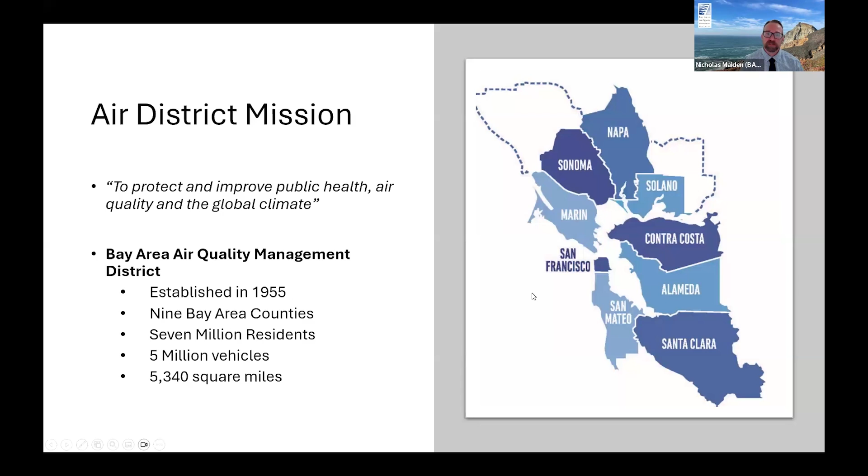So what does the engineering division itself do? We issue permits for over 10,000 facilities. We get about 1,200 or so applications per year. That varies depending on market and other factors. But a good portion of that, 400 or so, are engine applications. And we conduct about 300 health risk assessments per year.

We issue several different kinds of permits. Authority to construct, which allows you to construct or install equipment. What's called a permit to operate, which allows you to operate equipment. And then a registration if you don't need an authority to construct or permit to operate, and then a certificate of exemption if you choose to get one from us. We also maintain an emissions inventory, and we issue and maintain federal operating permits.

So here's some statistics about the engines that we have. We've permitted close to 11,000 internal combustion engines. The bulk of those are diesel emergency backup engines, and of those, the majority are between 50 horsepower and less than 1,000 horsepower. That's what we call small to medium-sized engines. Anything larger than 1,000 horsepower was covered by a previous BACT determination and webinar.

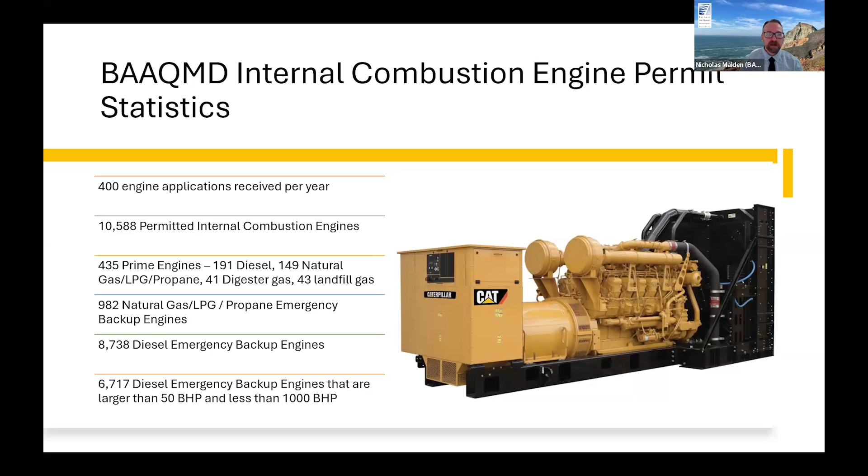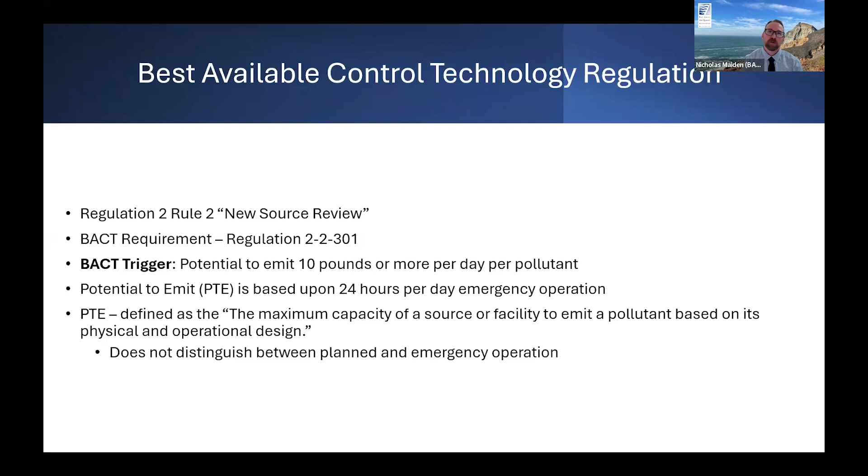So what is BACT? We have a couple regulations that govern it. Regulation 2, Rule 2 is our new source review rule. It applies to new or modified sources of air pollution. And there's a requirement that if you have the potential to emit more than 10 pounds per day of a pollutant, you'll require best available control technology. For emergency generators in particular, it's based off of 24-hour operation. It doesn't distinguish between planned or emergency operation. So even though you may have an engine intended to only operate in emergencies and maybe up to 50 hours per year for maintenance, it will still trigger BACT based off of that 24 hours.

So what is BACT? How do you establish it? There are similar definitions in both regulations, but there's a little caveat. Both BACT and TBACT look at what's most stringent, either achieved in practice. So if another facility has put in something that's better performing and there's an emission limit and it's been demonstrated through source testing and other means to meet that limit, then that could be deemed achieved in practice. There's something called technologically feasible and cost effective for BACT, where if there's something more stringent than what's been deemed achieved in practice, it's technically feasible for that particular source category, and it's cost effective, so the dollar per ton of emissions reduced is below a certain threshold, then we'll require that.

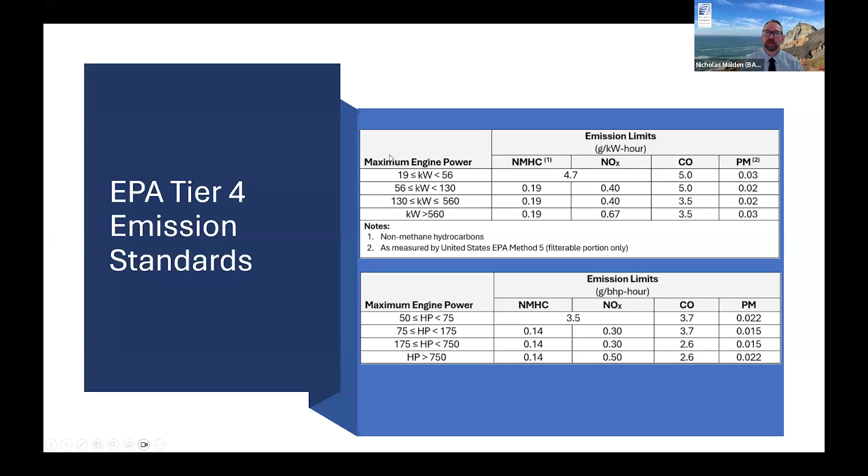One of the things that concerned us, particularly with these generators, is if they're available, because as we saw on the statistics slides, there's a large number of applicants and facilities that have these installed. So we want to make sure that these Tier 4 engines that are certified through EPA are available. And so we reviewed a database that EPA publishes of engine models and manufacturers and different size engines that have been certified to meet Tier 4 emission values.

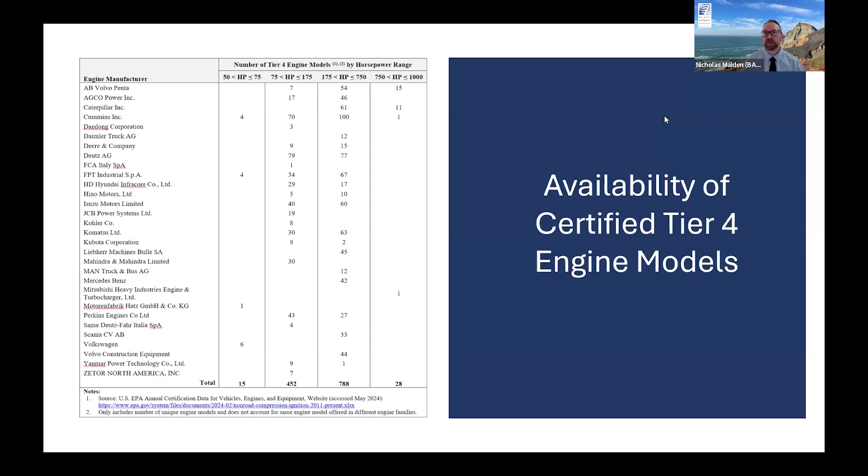And so we concluded that there are a significant number of available models, that this wouldn't be a limiting factor for applicants going forward. So how may an applicant comply with the Tier 4 emission standards? The first way is purchasing or installing a certified Tier 4 engine.

This is certified by EPA to meet Tier 4 standards, and there's a process that they have to go through. They source test, they review emission limits. There's some requirements these engines have to meet, and some features they have to have installed to be able to be certified. The second option is to have what's called a compliant Tier 4 engine.

So this is an engine that's packaged by the same manufacturer with manufacturer abatement equipment with identical or near identical components as a certified Tier 4. It just hasn't gone through their certification process, and it doesn't have some of the features that EPA requires for a certified Tier 4 engine.

The final way is to install what's called a retrofit Tier 4 engine. This is where an applicant may have a lower tiered engine, Tier 1, Tier 2, Tier 3 engine, and they add abatement equipment from a third-party vendor that's not necessarily made by the engine manufacturer. Because this is not made by the same manufacturer, there may be more requirements imposed because there's less certainty that it will meet these Tier 4 standards.

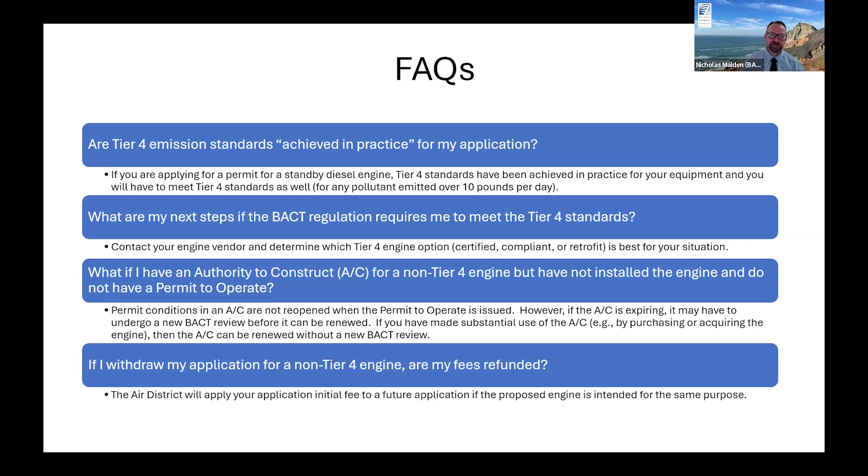So one question that comes up frequently, not just for engines, but for anyone: they find our BACT workbook or BACT guidelines on our website, and their equipment meets what's standard in that BACT workbook, and they figure that they meet BACT or TBACT. And as I mentioned earlier, the guidelines are really just a starting point. They don't supersede the regulation.

So BACT and TBACT is made on a case-by-case basis at the time an application is deemed complete. So if equipment comes in meeting the BACT workbook, it may or may not meet BACT. It depends if nothing more stringent has been deemed achieved in practice or technologically feasible and cost effective.

This question has come up; we've heard this from some stakeholders in other air districts where certain industries have said they're not allowed to install a certified Tier 4 engine, and they pointed to this NFPA regulation 110, and there's actually an amendment that was just passed where the language specifically states: where used for permanent level 1 applications, EPA mandated inducement engine shutdowns due to emissions system controls that are required on Tier 4 certified engines with SCR shall be prohibited.

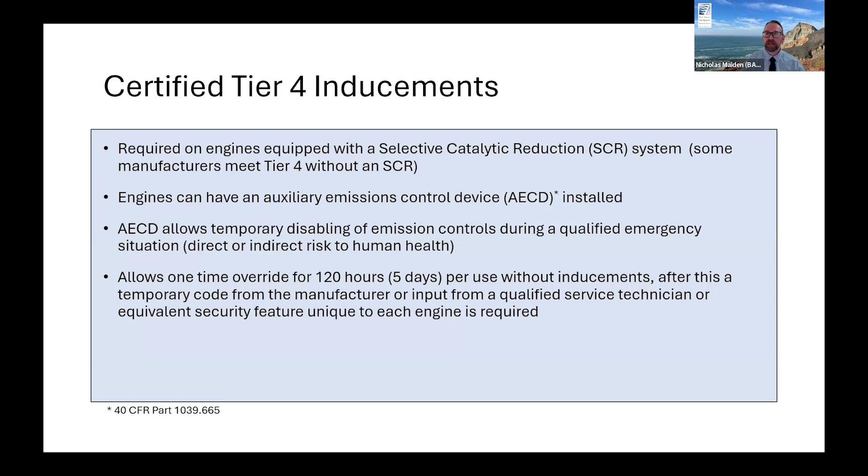And that NFPA 110 amendment actually applies to what's called level 1 installation. And so that code, NFPA 110, actually has 2 levels. Level 1 is where failure of equipment could result in loss of human life or serious injuries. And level 2 is where failure is less critical to human life and safety. And they give examples of both.

So level 1, if you have an elevator, a fire pump, fire detection, life safety illumination, emergency services communication systems, so like 911, essential ventilating and smoke removal systems, medical life sustaining systems. And level 2 is heating and refrigeration systems, communication systems other than emergency services, industrial processes, and water and wastewater treatment systems. And then standby generators used solely for telecommunication services to meet FCC guidelines are classified other than level 1 or level 2.

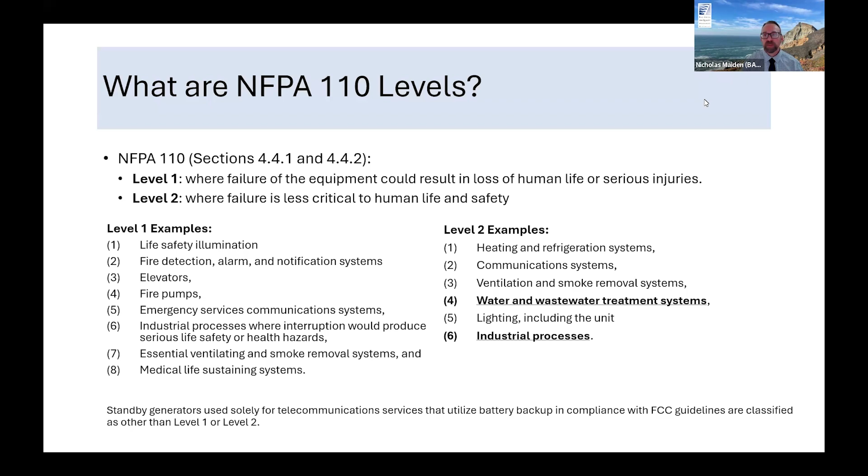One thing we've heard from stakeholders is they say, hey, I'm an essential public service, which is defined in our engine rule. It's defined in section 9-8-233 as a sewage treatment facility and associated collection system, water treatment delivery operations, public transit, police or firefighting facility, airport runway lights, or hospital or other medical emergency facility.

And the distinction between essential public service under Regulation 9 Rule 8 and not is how many hours of maintenance and testing you're allowed. So Regulation 9-8 allows essential public services' emergency generators to have up to 100 hours per year of testing and maintenance. Everyone else is limited to 50 hours per year.

And you can see there's a difference between the definition of Level 1, Level 2 in NFPA and Regulation 9 Rule 8. And so we listed some scenarios where you may be subject to that NFPA 110 amendment regarding the inducements. So the first scenario, your emergency standby generator is at a wastewater treatment plant. The way we interpret it is you're not subject to that section 5.6.5.5.1. You wouldn't need a certified Tier 4 engine with an auxiliary emissions control device. You can install any certified Tier 4 engine and still be in compliance with NFPA 110.

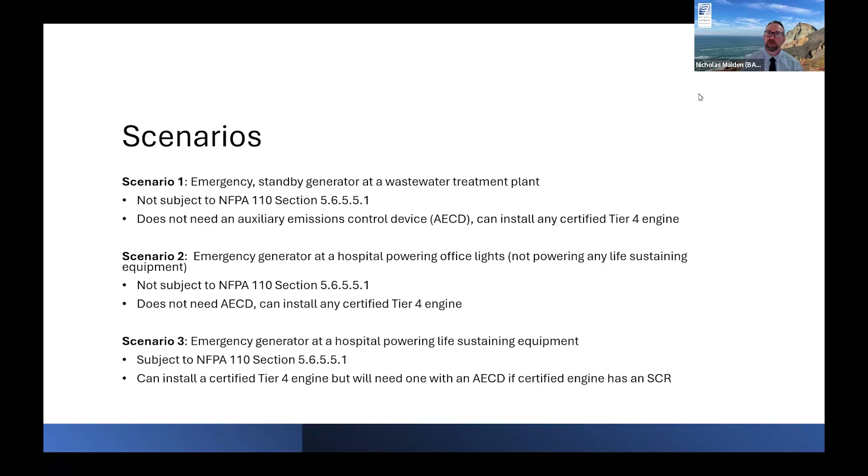So the question can be, does this mean that BACT or TBACT is certified Tier 4? No. As I mentioned, you can have a retrofit or a compliant Tier 4. However, the certified requires the inducements, and the intention behind that is that the engine won't operate. There are restrictions on operating the engine without required emissions controls. Similar to all our equipment that uses abatement to meet BACT or TBACT, we have a permit condition requirement that says you have to abate at all times, including emergencies.

And so if an engine is operated without emission controls, the owner operator would be in violation of that permit condition. What we're also proposing is that if you come in with a compliant or retrofit engine, there will be requirements to identify and track some features that will let us identify when an engine is operated without emission controls. So the alarm, data loggers, and some other features that'll alert us that an engine was operated without the controls.

And that owner operator, unless they obtain what's called a variance or an emergency variance from our Air District Hearing Board, or they obtain breakdown relief with our Compliance and Enforcement Division, will be in violation of the permit. So the other advantage to coming with a certified Tier 4, in addition to faster processing and less restrictions, is there's less enforcement risk, fewer parameters you'll be held to and required to track, because the inducement features will hopefully prevent operating the engine in a non-compliant situation.

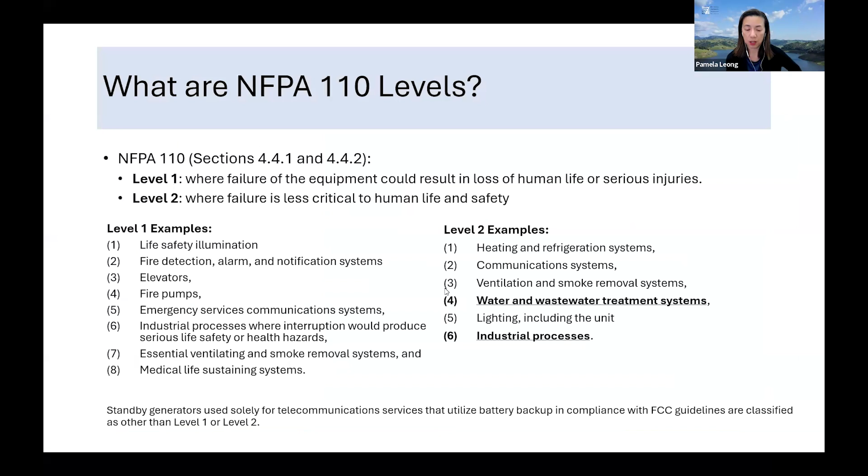In what situation will a retrofit Tier 4 engine not have abatement? The first two sub-bullets. So I think you're referring to your slide with the certified on the left, compliant in the middle. Yeah, this one. And if anybody wants to come off mute to clarify their questions, you can just raise your hand and we can unmute you.

Yeah, this is where we've seen that there are some, it appears from EPA's database, certified Tier 4 engines, that there are engines that through exhaust gas recirculation, through engine modification, can meet Tier 4 standards. And so this Tier 2, Tier 3 no abatement is the case where an engine manufacturer may take a Tier 2, Tier 3 engine and then through engine modifications alone meet Tier 4.

And the reason why we're making a distinction between engine modifications and CARB verified DPF is that there's more uncertainty with engine modifications that they can meet the emission standards. Whereas with the DPF, since you can add it on and we can verify the DPF is actually installed, that there isn't an issue with the DPF, there's a little more certainty with the emission levels. But if there's an engine manufacturer who'd like to correct us, please do.

Also, what we didn't mention is that if you go ahead and submit comments or if you have feedback afterwards, we'll take those as well. Right here, we're trying to cover different scenarios because we are rolling this out. We expect we will learn some things. We may find that there aren't Tier 1 retrofit installations out there. There isn't a Tier 2, Tier 3 abatement, no abatement option out there. In which case we won't see those applications and these scenarios wouldn't apply.

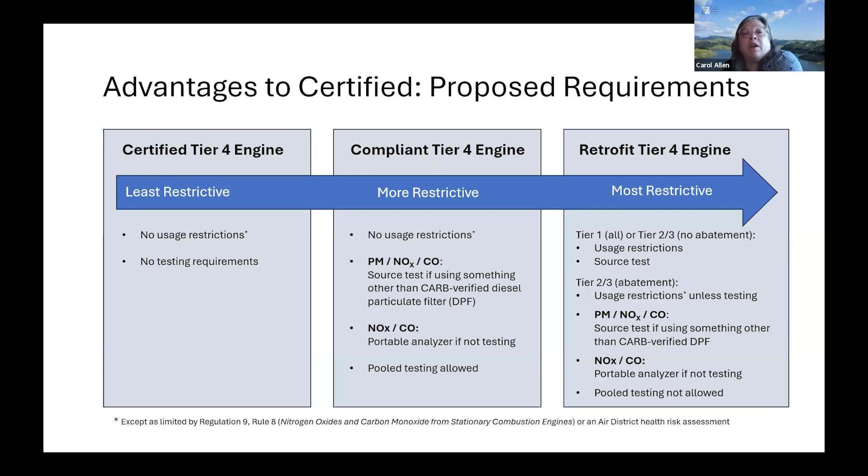Yeah, I was going through the chat and answering several questions about receptors and receptor distances. So there was a question, can you clarify how you define a receptor for the streamlined HRA criteria? Is it just residential or sensitive receptors? So receptors are defined in Regulation 2, Rule 5. They include residential, worker, and student receptors.

And residential receptors may potentially be on site at a facility. So for example, if you are an applicant for an emergency generator for an apartment building or say a senior housing facility, those would have on-site receptors. And so those are definitely included in the receptors. Worker receptors are generally off-site worker receptors.

But if you have a building where you're applying for an emergency generator for your operations in that building, but there are other facilities and other entities operating in that building that are not associated with your facility and are not under your control, then those other facilities would be considered off-site worker receptors.

And there was a question about how do you determine the distance? And the distance is from the exhaust point of the engine to that nearest receptor location. And that generally means the building in which the receptor is located rather than like a parking lot.

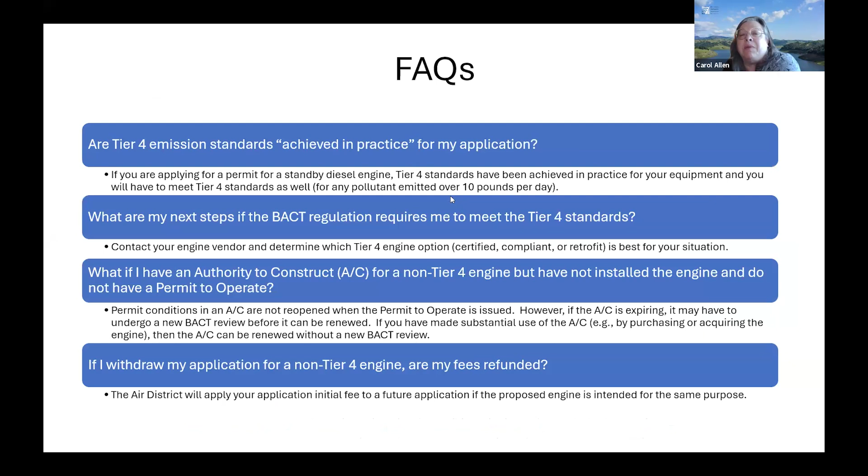And I think the last question was about the hours of operation limitations, and do they apply to emergency hours or only the reliability related testing hours? Those are reliability related maintenance and testing hours for that table there. Those are not emergency operation times. Emergency times are excluded from the health risk assessment.

I think, yeah, I saw another one. Someone asked, how can we apply for a permit? I think the same person asked in the Q&A, how can you check if their facility has a permit? I'm assuming it's their facility. If that's your facility, you can ask your permit engineer if you have a permit. On our website, under the permitting section, it has instructions on how to apply for a permit, or you can talk to your permit engineer. We also have a permit ombudsman that you can contact, and their email is also on our website.

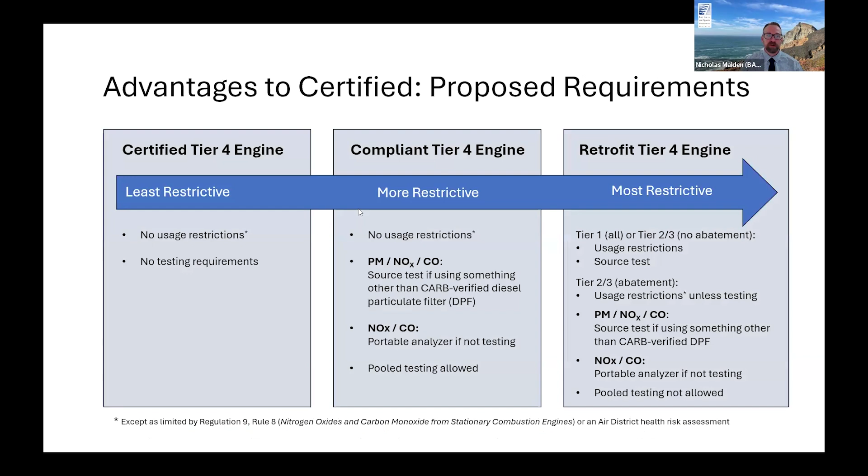Let's see. Are all of the engines shown in the slide used in emergency generator applications? There are significant engineering costs for a UL 2200 listed and seismically certified unit, and showing all Tier 4 final listed engines is not an accurate representation of the units available for emergency standby applications. So I guess this is Nick, your list of the available models. I believe they're referring to the 35 plus, or are they referring to the availability?

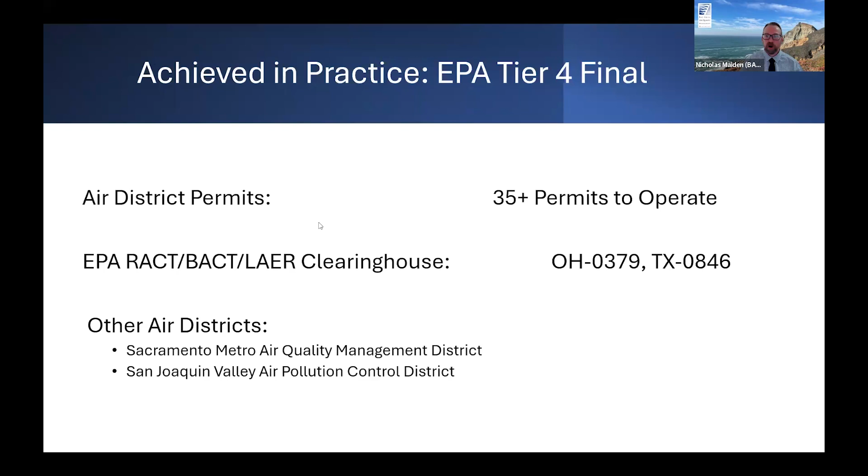What I will say is the air district permits that we saw, Tier 4 engines, they ran a gamut. There were some at wastewater treatment plants, hospitals, different kinds of facilities, a few like fire pump engines, standby generators. I don't recall all of them. I'm not familiar with the UL requirement. Okay, so if you have more to clarify, if that didn't answer the question, you can always email us with more detail. Thanks.

Okay, does this affect hospitals? And yes, these would affect hospitals. What date will BACT take effect? Again, that's for applications submitted December 2nd or after.

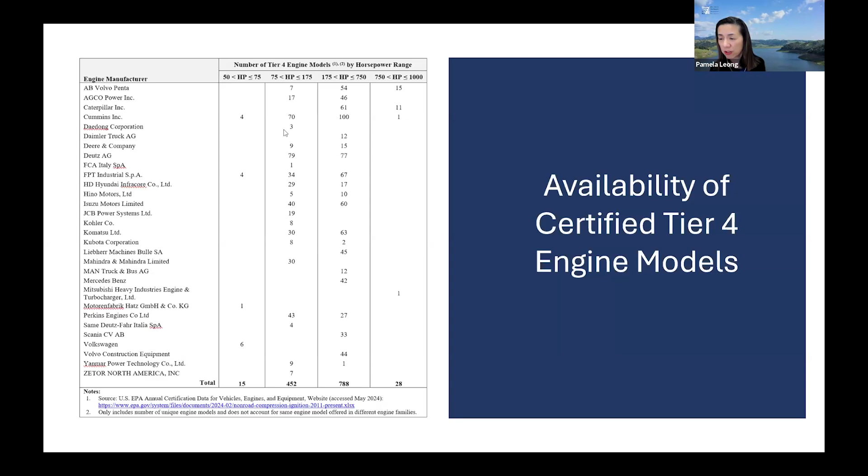Okay, I don't know, Carol, how do you determine sizing an engine in hours not to trigger an HRA? I think that's just all on the table. I don't know if anybody has their hand raised and wants to clarify that, or maybe just list it. Yeah, these

requirements here, if you notice, there's size ranges for the engine on the left under the column engine capacity ranges. This table is set up really for a single engine application. So if you have, for example, a 350 horsepower engine, your engine size range would be between 300 and 600 horsepower.

In order to avoid having a health risk assessment altogether, if your project is located within 100 feet of a receptor, then you would need to limit your non-emergency operating time to 13 hours per year. The both there is referring to both projects located in overburdened communities and those outside of overburdened communities.

If your distance was a little bit farther away and you had a project in an overburdened community, then you could qualify for HRA streamlining, which would be a faster process than a refined HRA, but would still be subject to a public noticing requirement if you limited your hours of operation for that engine for non-emergency purposes to 21 hours per year.

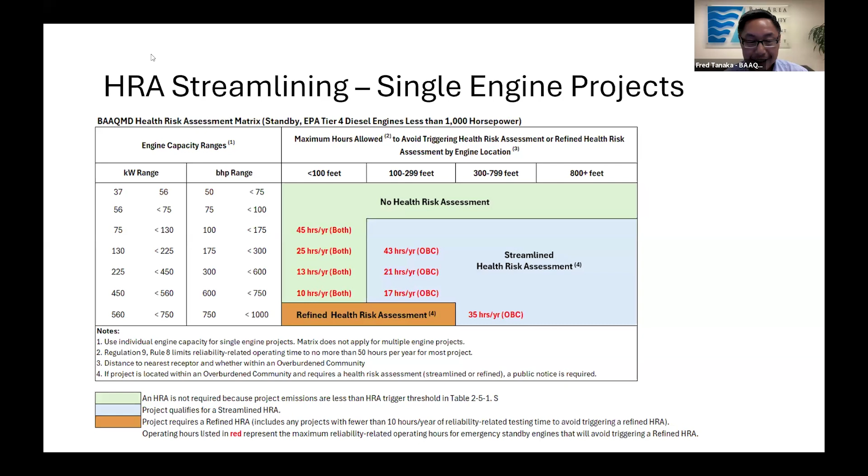Yes, my name is Bill Winchester. I'm with Montrose Environmental. I just have a quick question about the HRA streamlining table that we were going over earlier. I just want to make sure I'm reading this correctly, and maybe I'm just misunderstanding it. But it appears that there would be no health risk assessment required in cases where you're less than 100 feet to a receptor. My interpretation of this is that maybe the no health risk assessment is actually flipped to the wrong side of the table.

You know, that the closer you are to the receptor, that you would not be triggering health risk assessment versus a streamlined health risk assessment. So perhaps it's 800 plus feet that you would have no health risk assessment with those hours? Maybe I'm misinterpreting this.

No, this is, so the intention of this is to know what limitations you'll need to accept. And so on the left-hand side, regardless of hours of use, if you comply with the 9.8 rule hours of use, if you're less than 100 horsepower, there is no restriction other than 9.8. You won't trigger health risk. If you're within 100 feet and you're larger than 100 horsepower, then you do need to have more restrictions on hours of use than 9.8 to not trigger health risk. Otherwise, you'll be a streamlined health risk.

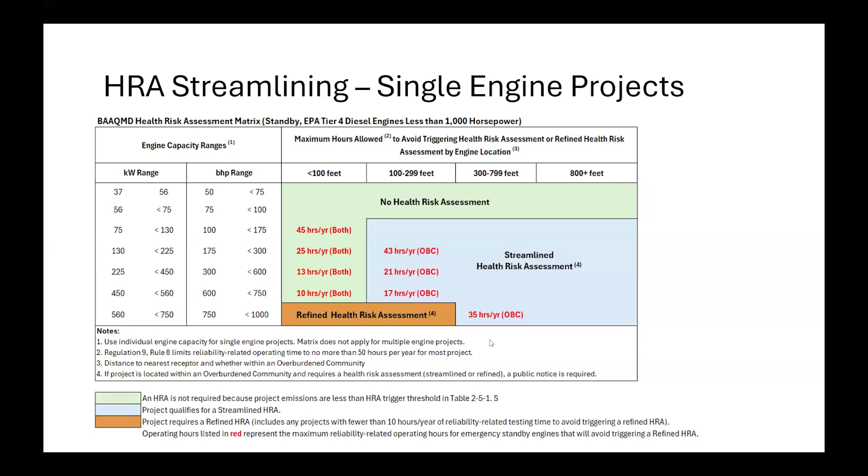Oh, so you'd be over 40. You would need the streamlined if you were over 45 hours of testing. No, you would require a refined health risk assessment if you're over. Oh, 40. Yeah, that's what I meant, over 45 hours per year.

So if you're operating an engine at 50 hours per year, and you're between that 100 to 175, if your distance to the receptor is less than 100 feet, and you're at 50 hours per year, you would require a refined health risk assessment. If you were at 100 to 299 feet or greater at 50 hours per year, you could qualify for a streamlined health risk assessment.

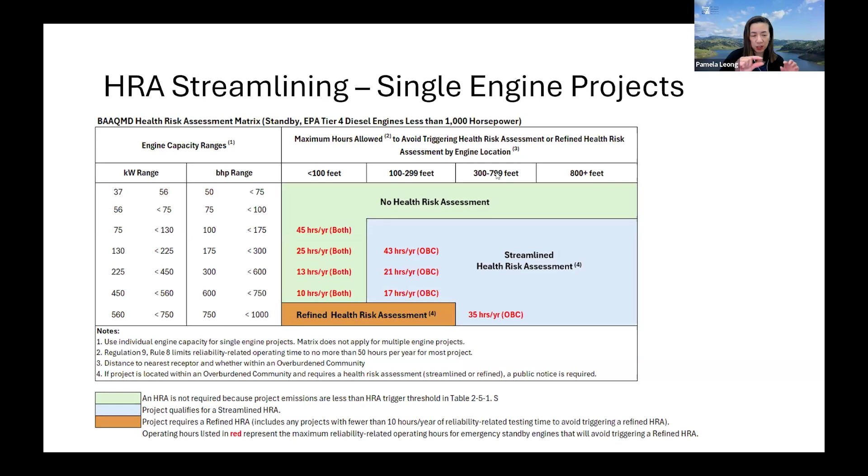Nick, maybe you could flip to the more comprehensive one because it might show it a little bit. And Carol, really quickly, I just want to do a time check. It's already 2:08. I think we could stay on for like another 15 minutes because there's so many questions, but we'll probably have to cap it at that.

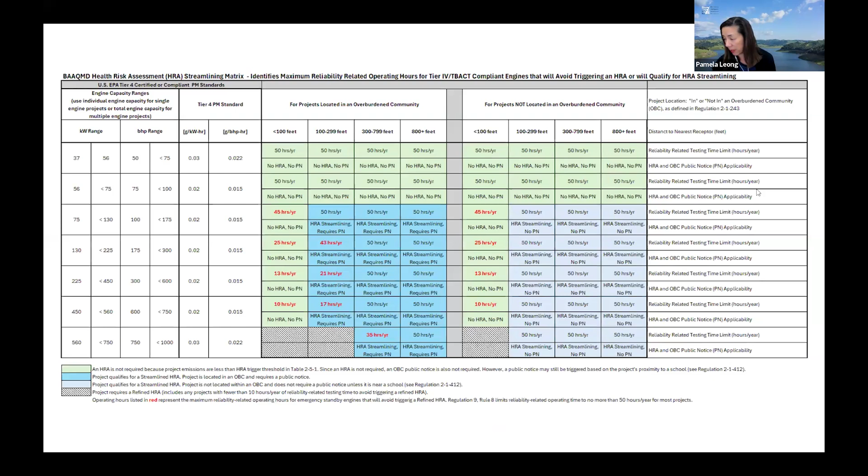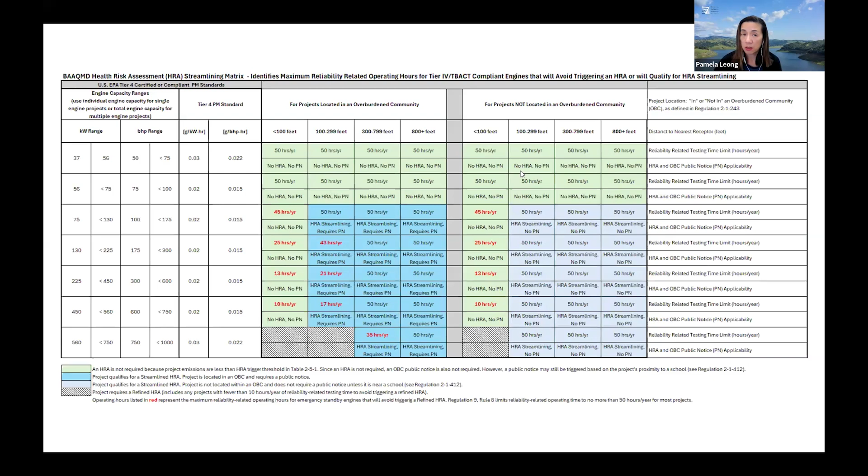So yeah, real quick, Carol, someone asked, what's the difference between streamlined and a full risk assessment? So maybe you could cover that quickly. So a streamlined health risk assessment follows procedures where we've already determined that these engines will meet the project health risk limits. So if the engine qualifies for TBACT, you get a project health risk limit of 6 in a million if you are within an overburdened community, or 10 in a million if you are greater than that.

And our streamlined procedures take those higher levels into account. So TBACT is triggered for the engine at 1 in a million. And once you've triggered TBACT and determined that you're meeting TBACT, then you get a higher project risk limit for the application. And like I said, those are 6 in a million for overburdened communities, 10 in a million for not. And so the streamlining procedures take all that into account, and we've determined emission rates that would qualify for those engines under those given circumstances.

And so timing for a full HRA depends on how many are waiting for HRAs in front of you. How many requests are in front? And so the full health risk assessment includes a full air dispersion modeling run to determine what the impacts would be. It typically requires at least a couple of weeks once we start it, depending on how many requests are in the queue. But it's a much more site-specific and detailed analysis.

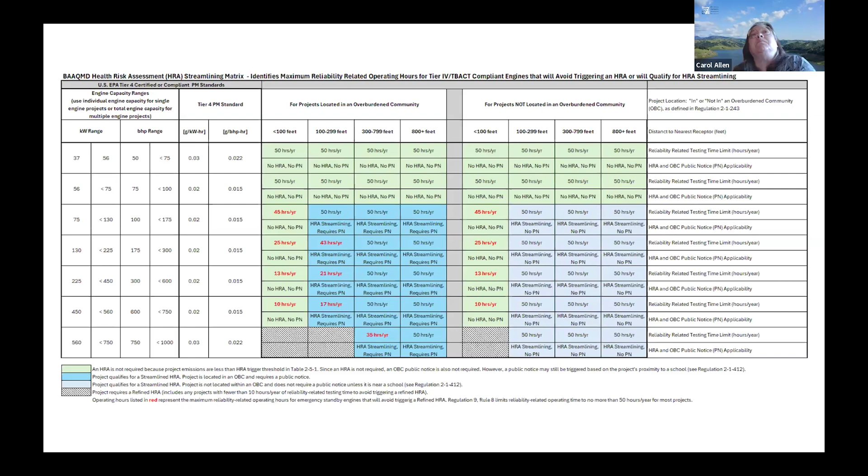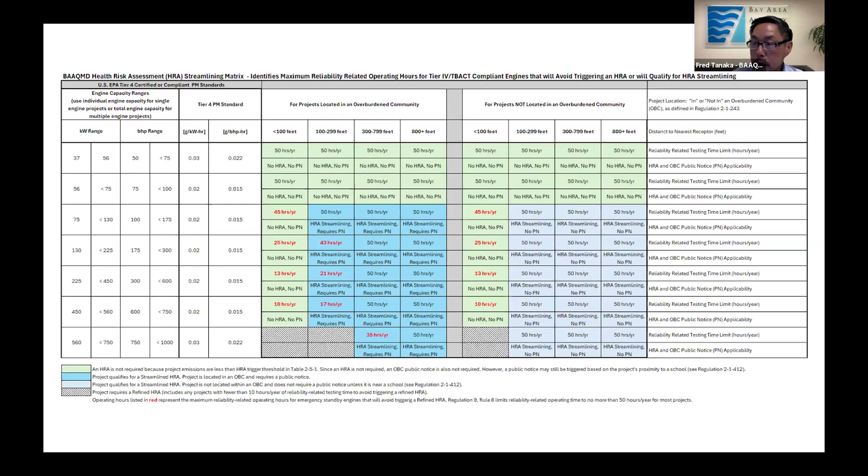I'm not sure if I misunderstood what you had said. It sounded like you were thinking that if you put the emergency engine in a Tier 4 final certified application, if you put it in inducement override, that you wouldn't have any problems with it derating. The override is only on the SCR system. It does not affect anything else. So if your DPF sensor has a problem, if you have a short in that system, if you have a DPF plugged, it's going to derate. And that would not be acceptable under the new NFPA 110 guidelines.

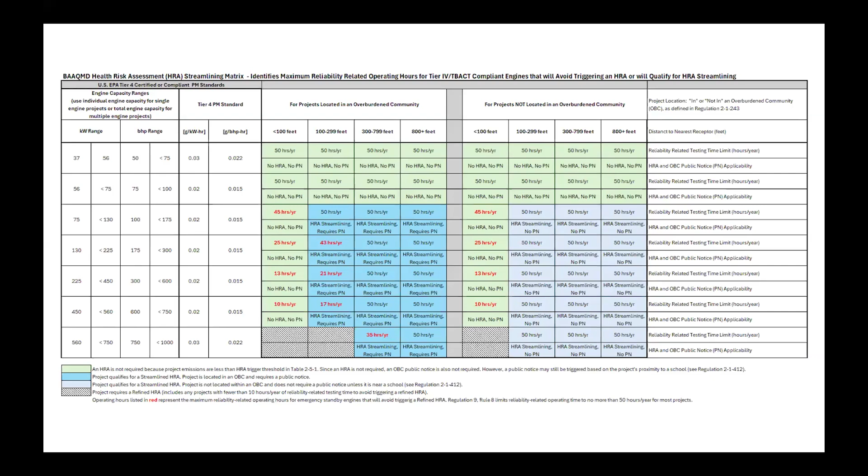It's just a comment, but I thought I heard you say that it seemed to be not a problem if you put it into override. Yeah, I don't know if you have more feedback on the specifics, if they're engine manufacturers. Well, I work for an engine manufacturer, for Caterpillar, and the inducement is strictly for the SCR only.

When you put it into that override, it will go 120 hours. If the SCR system has any problem with it, it will override that. And by the way, the NOx system still works during that override. It doesn't take it out of service. It continues to operate like that. But if it comes back on after 120 hours and there is a problem with the SCR, it would also derate and shut the engine.

But all along this whole time, only the SCR is affected by that override. The DPF system is not affected with an override, so it can derate or shut down in the case of a fault code on the DPF system.

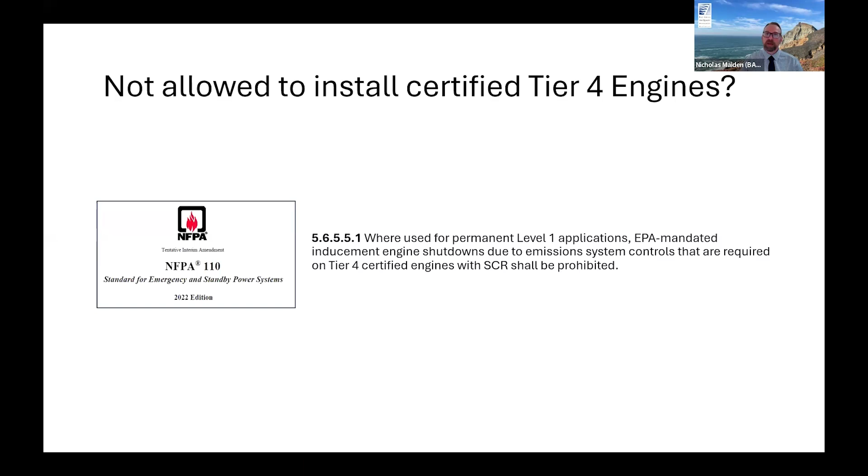And my question would be... Oh, but there are inducements on any parts of the emissions controls. They're there for both the particulate as well as the NOx. But that's what the EPA is saying is, yes, we're only looking at the inducements being overridden for the SCR. They are not overridden for the DPF. So you could still have a problem. And does the EPA require inducements for the DPF, or is that a manufacturer? It does. It does.